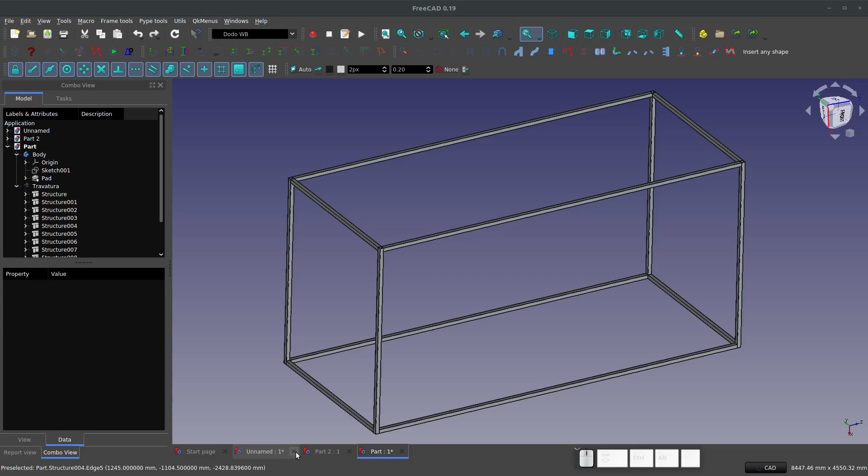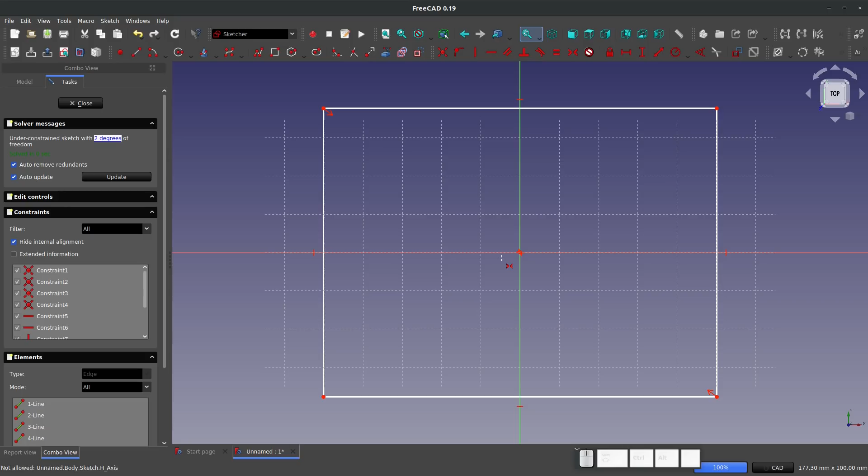So let's get started by making a new part. And in here I'm actually going to start with the Part Design workbench. Now I'm sure that you can do this from a sketch as well, but I'm going to choose like a reference solid here. So sketching on the XY plane, it really doesn't matter too much what my dimensions are, but I'll constrain this for good practice. We'll give that a vertical dimension

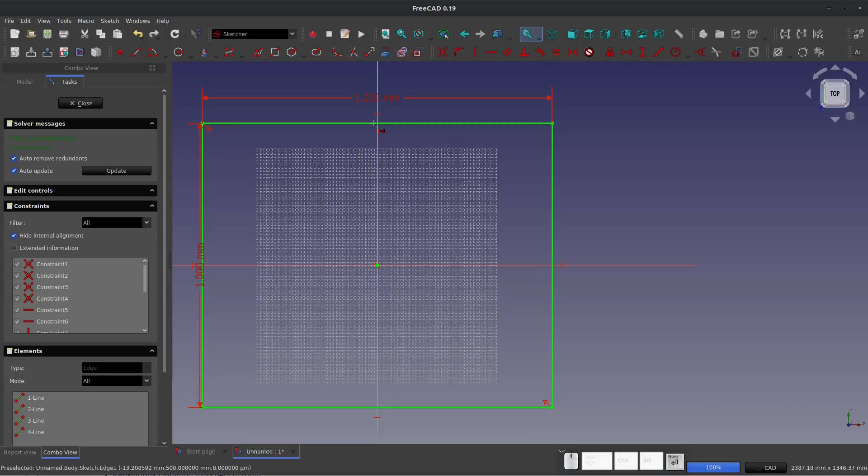of, say, a meter. And notice I have my keyboard monitor here if you need to see my hotkeys. Also, of course, Shift H rather. Let's go with 1200 maybe. We'll close, do an extrude, and let's do maybe 500 millimeters in this direction.

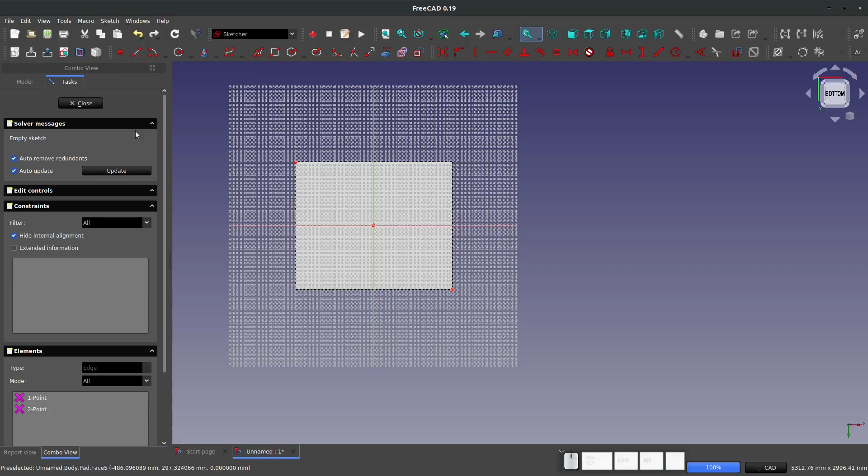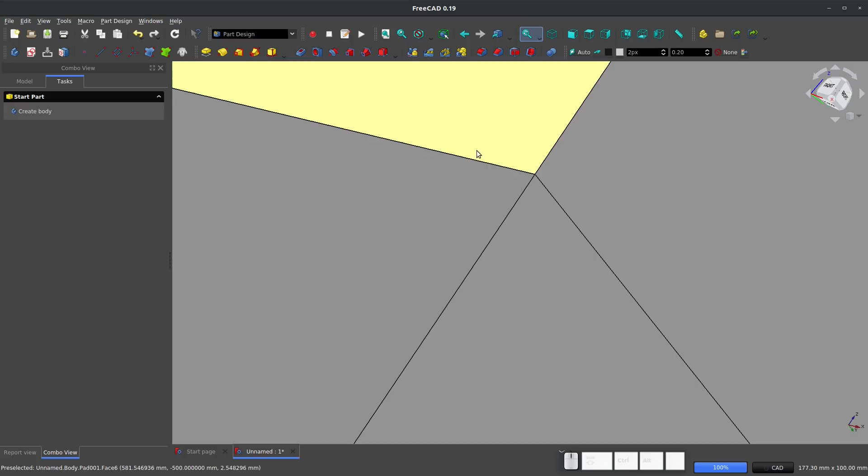I'm going to select this face now and create another sketch on this face. We'll convert here and here, and I'm going to make a rectangle of the exact same size. We'll close that. We'll do an extrude. Maybe this time a meter. All right, so I have a rectangular prism that has a line going through it, right? And I want to illustrate why I have that line.

So let's pretend that we want to make a rectangular frame, and all of these edges we want to be structural members. Well, I'll go into the Dodo Workbench, because otherwise this would be a lot of extrudes. Let's go to this button right here, Open Frame Branch Manager.

Almost sounds like some kind of position you'd hear at a bank, right? Like, oh, I got to make a deposit. Let me get the Frame Branch Manager or something.

I'm going to choose a profile, and of course there's a number of profiles to choose from, but I'm going to keep it simple. RH, this is square tube, 40 by 40 by 5 millimeters thick, and I'm going to select the edge of the solid that I wish to turn into a frame, and notice all these edges are going to be frame members, right? Weldment members. So I'm going to select my edge and click OK.

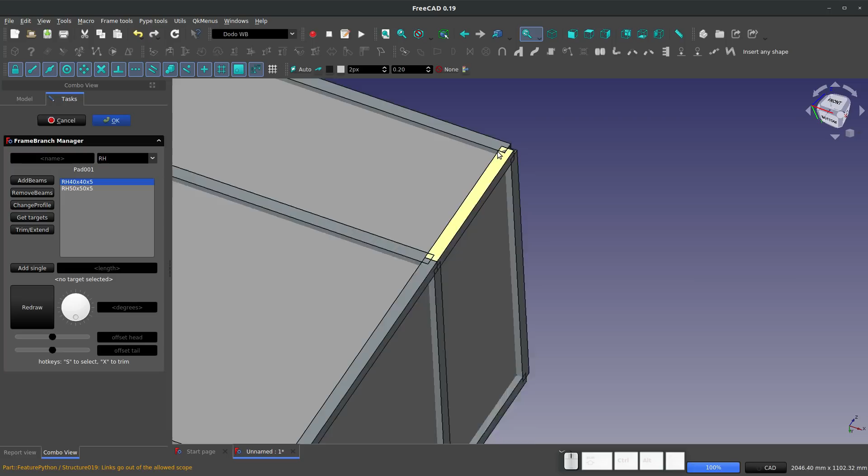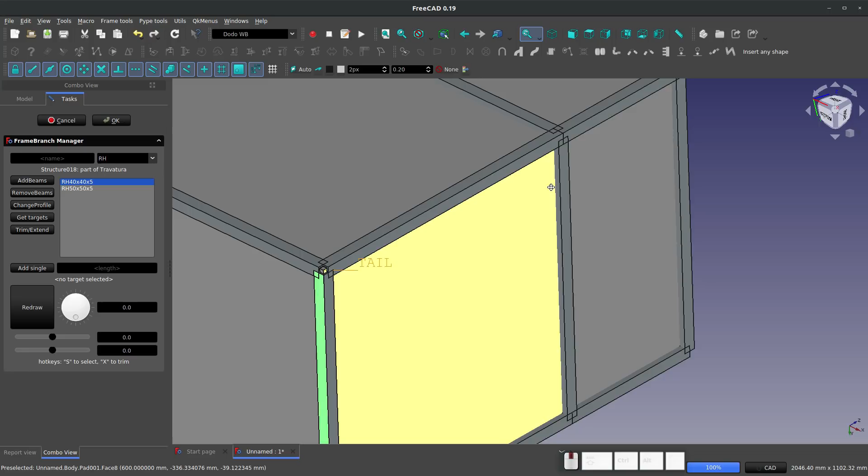And when I do that, you can see all of these structural members show up. Really fast and handy way to make a frame, and all these are 40 by 40 by 5. So let's get into how to deal with this edge treatment. Well, first off, I have this member here, and it starts in the middle of this and ends in the middle of this, and I'd like to address that. Maybe I'd like it to end at this face and end at this face.

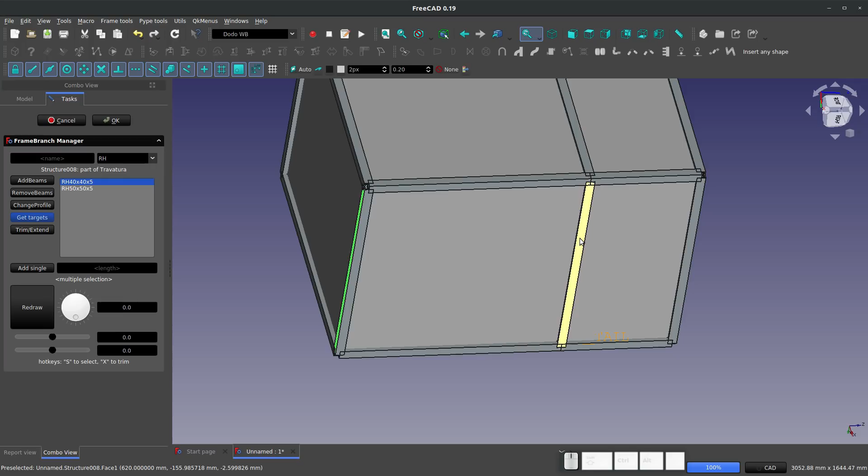To do that, let me select this face. I'm going to hold Control and select this face, right? So I have the two faces selected that I want the ends of this to end at. So I'm going to click on Get Targets. And just with that clicked, now these two end faces are what we call targets. And I'm going to click on the element that I wish to trim or extend, and click on Trim and Extend. And it trims it and extends it to these targets here.

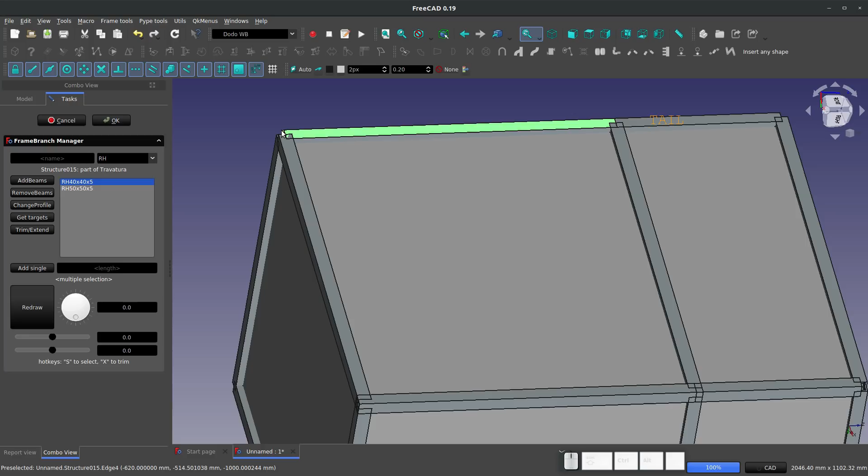Isn't that handy? Now I still have these targets saved, right? So I can select this piece and trim and extend, right? Now I can come down here, and I can select these two elements, trim and extend. And it does all of them at the same time. So that is a nice, easy way of doing this.

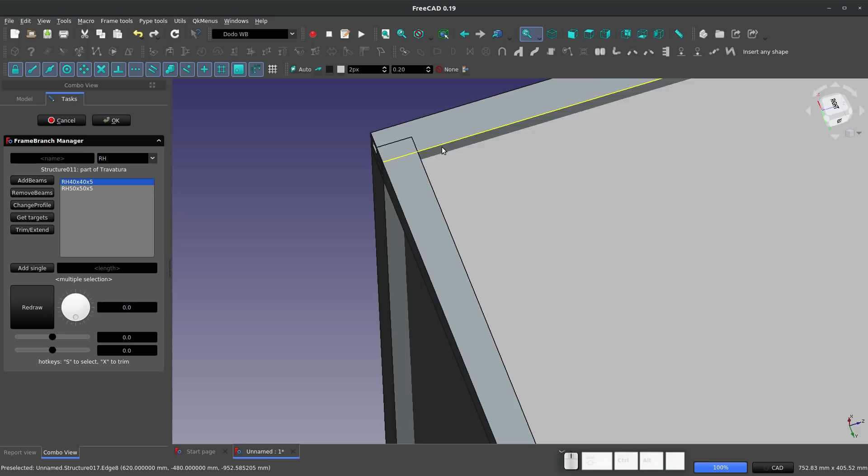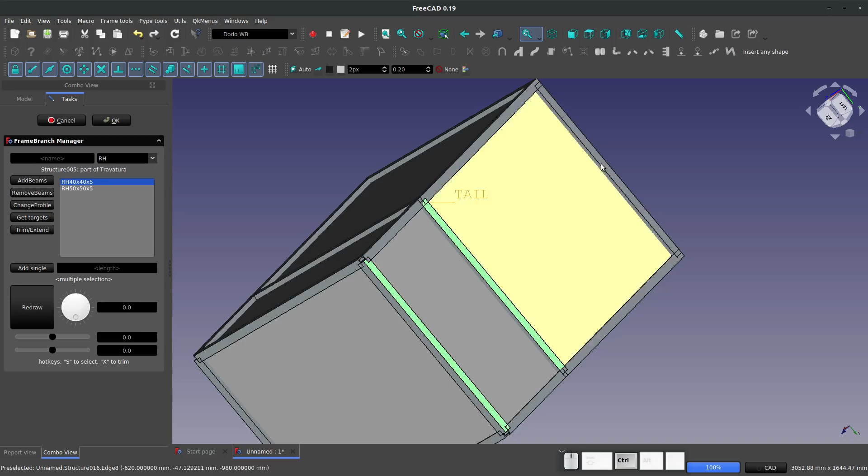Now, I may want to adjust some of the other elements, right? So I choose this inside face and this inside face, and I want all of these vertical members to be within these two faces. So I choose Get Targets, right? Now these two faces are the targets, and I hold Control. I'll select all of these 6 vertical members, and now trim and extend, and they're brought to be the correct length.

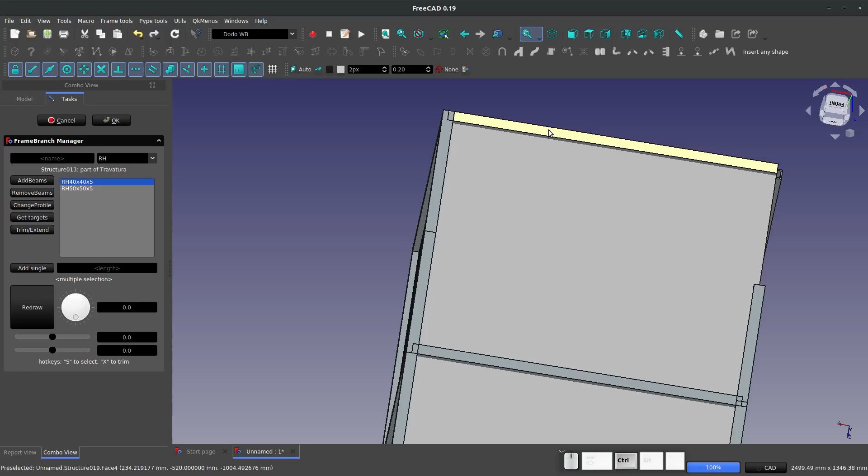Now same here. How about I select this outside face and this outside face, right? Two references on either side. Trim and extend. And let's choose this outer guy. Well, we should choose inside faces, shouldn't we? So we'll choose an inside face here, and an inside face here. No, but not that, right? First I want to get my targets.

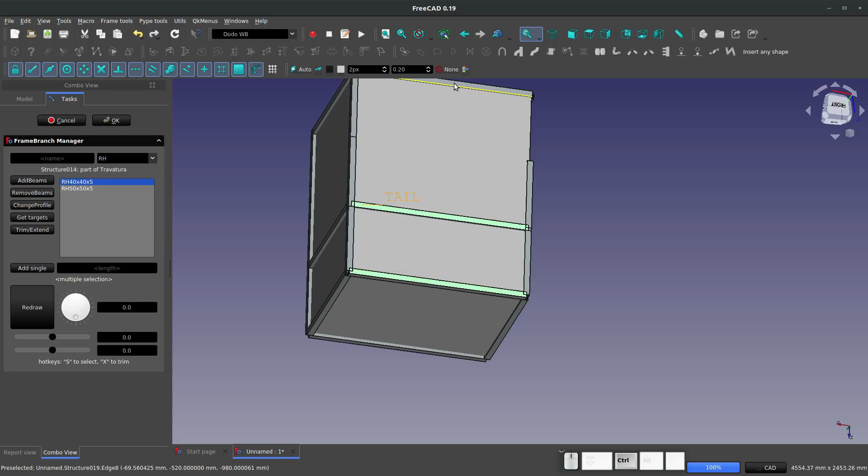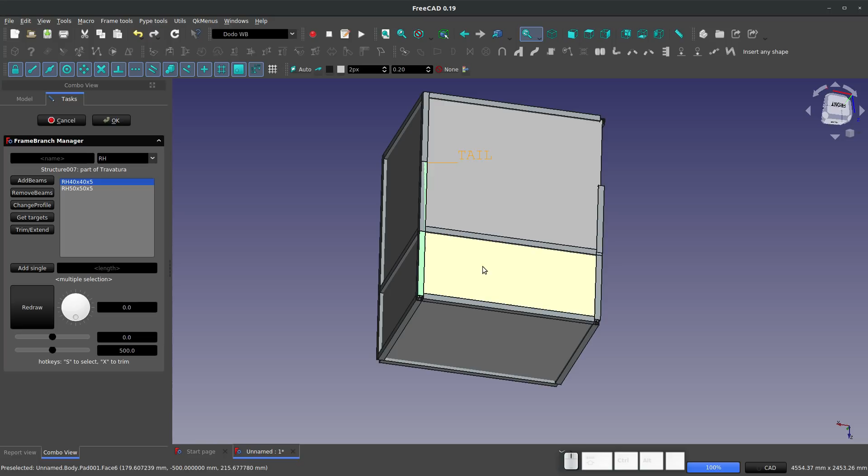So those targets are the inside faces, and I select, say, these three members here, trim and extend, and they're all made shorter to meet up with this face. Right, so now I may have a target here and here. So we'll get targets, and I choose this piece. Well, something happened over here. So, easily fixed. Maybe I accidentally selected that here.

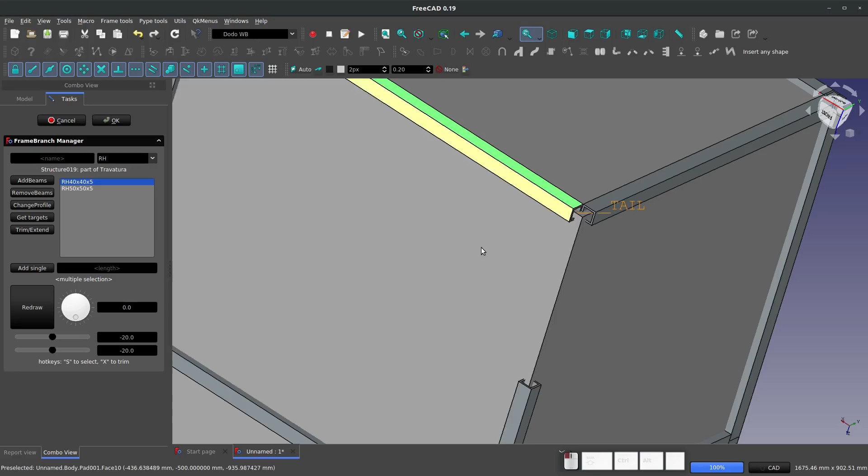Actually, we want this outside face. And I can simply retrim and extend this one if something goes wrong. So we're going to get targets, select this guy, trim and extend, and we've fixed that pretty easily.

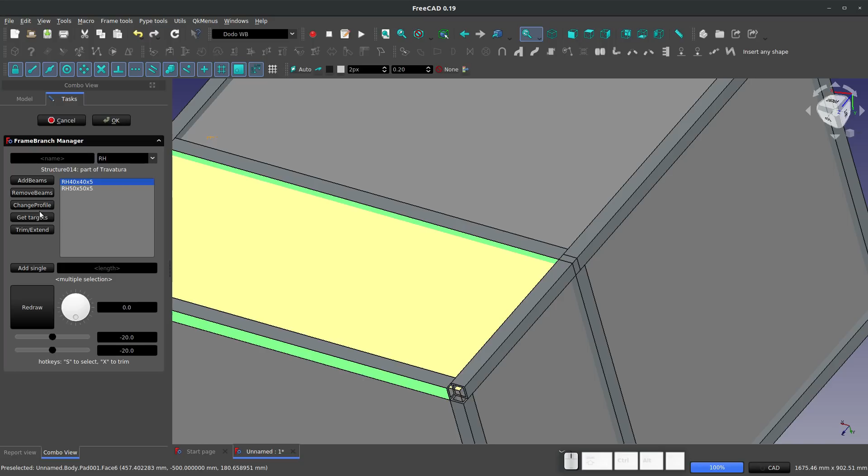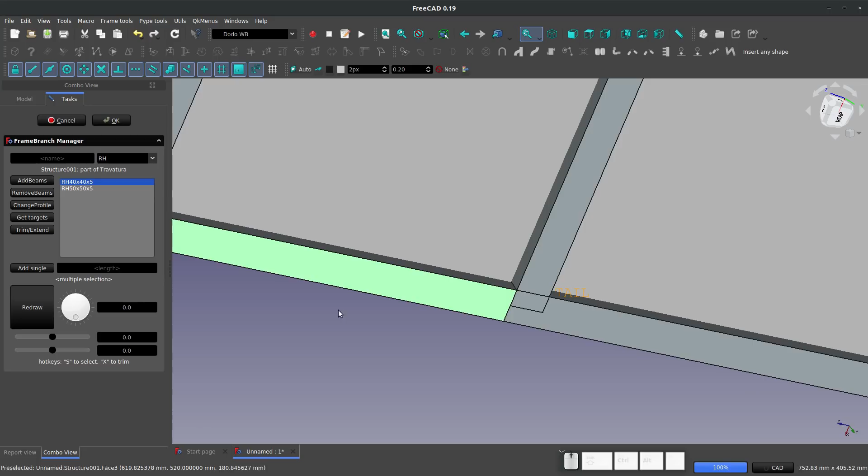So next, this face and this face will get targets. Then I'll choose here and here, trim and extend. And you can see how we pretty easily get all of these parts to fit together well by simply clicking trim and extend. In fact, I think we are almost there. We have some more interfering faces, but I think we've made a pretty good little frame here.

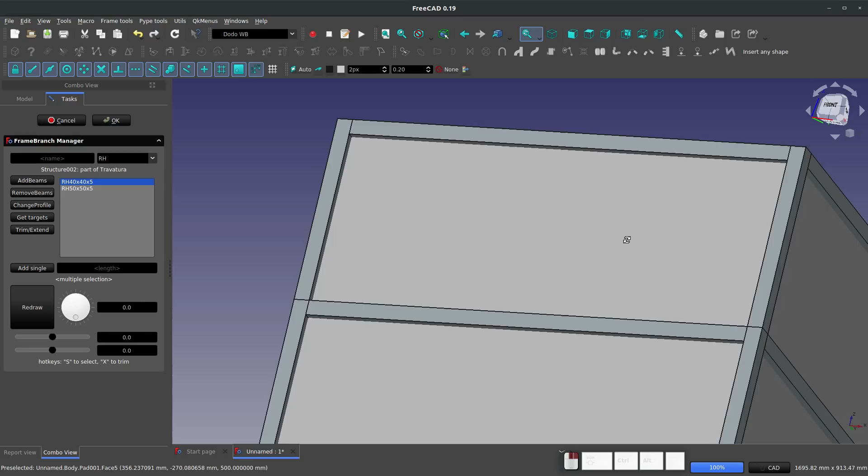So I choose these interfering faces, we'll get the target, and then I choose everywhere that I see an interference. Interestingly, that one isn't interfering. Those are all good. So just this side it looks like. Trim and extend. And now it looks like, I believe, that we have a complete frame with everything sized to the way that we wish to have it.

So the Dodo Workbench is quick, easy, and powerful. If I were to try to make the same thing with a bunch of extrudes, you can just imagine what kind of mess that I'll run into with trying to make all these sketches and trying to get all of them to work together and be updatable and everything. So this makes pretty easy work out of everything.

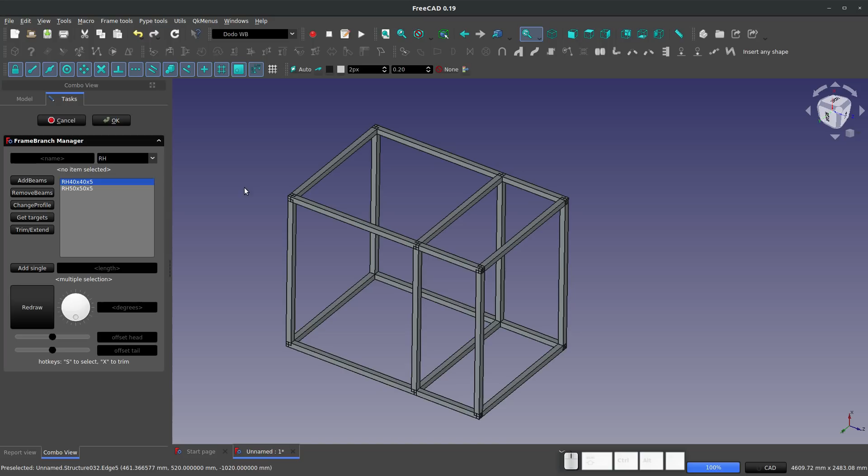Oops, I accidentally hit OK, which created a structural member over my old structural member. So I'm going to hit Control Z there and cancel. And you basically always hit cancel to get out of that. So that is a way that you can make frames in FreeCAD. Let me save that. So what else can you do with this workbench? Let's talk about some of the other functionalities and limitations in here.

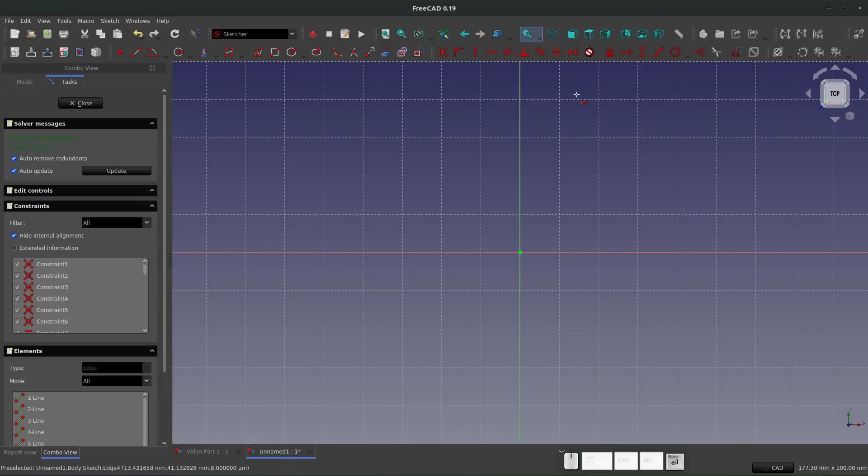I'm going to start a new part now. And this time it'll be very similar, creating a sketch on my top plane, but this time I'll go with a hexagon shape, and we'll make that horizontal, and we'll give this a dimension, how about 500 or half a meter. We'll close, extrude, I'll go symmetric, and let's say 1 meter.

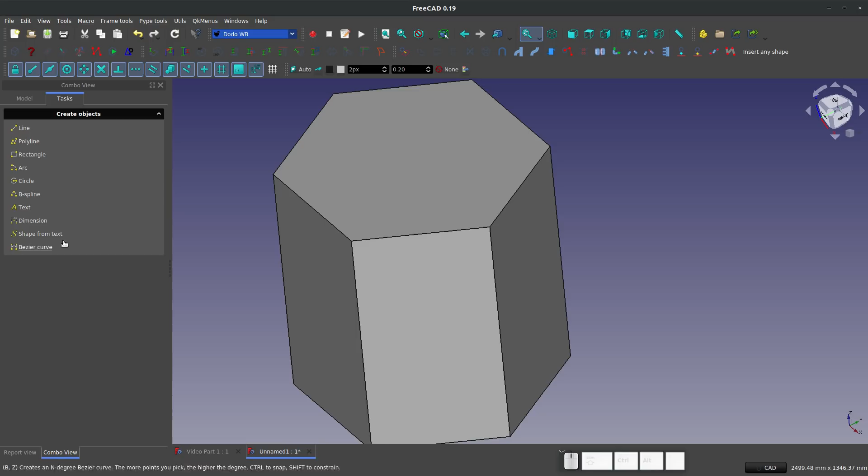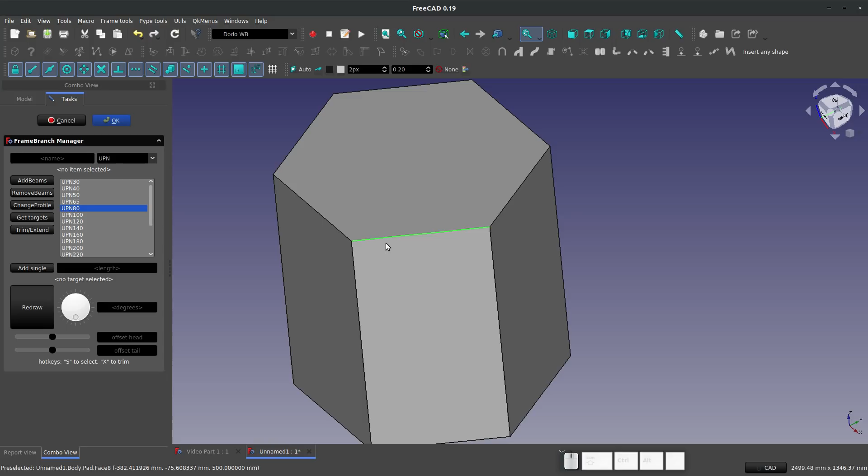With that, if I go to my Dodo Workbench now, and select this edge, we'll open up our frame branch manager, just like we did before. Here we have 40 by 40 by 5 millimeters thick, and, in fact, let's do something unique. How about UPN 80? It should be a U channel, and I click OK. Now I have U channel added to all of my faces.

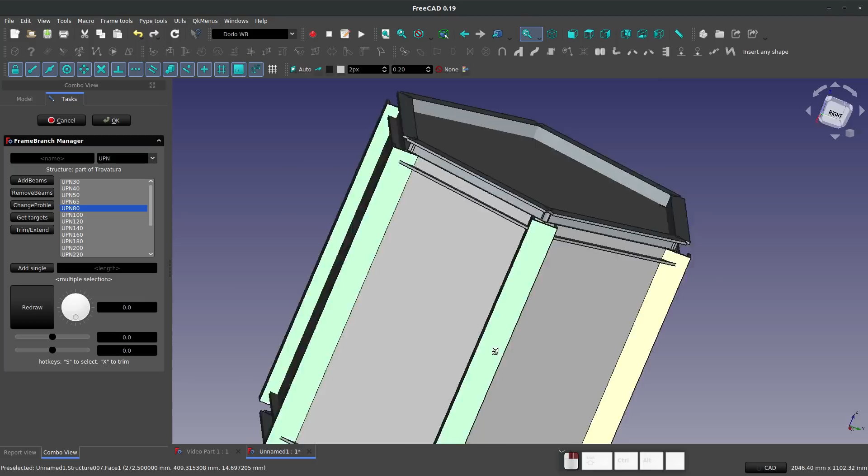So I have a U channel hexagon, and when I go to trim this, I can select my upper and my lower limit as before. I click on Get Targets, and then I select all of the structural elements that I'm working with. And now I choose Trim Extend, and as we've done before, this trims and extends very well.

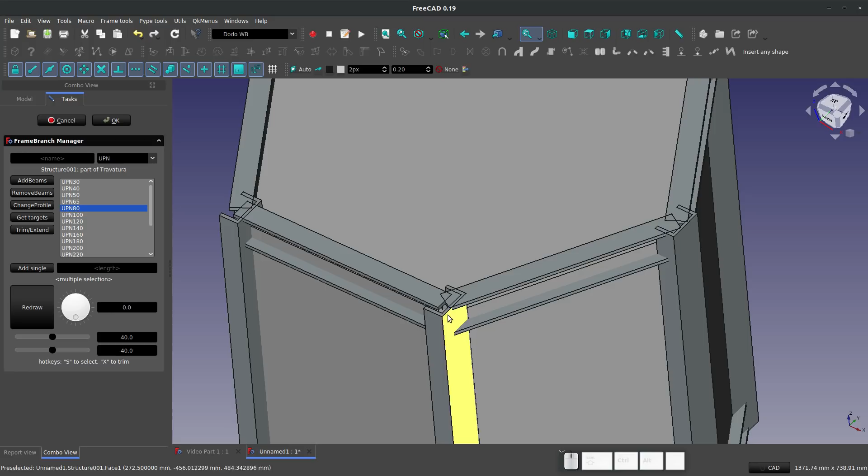But my U channels are all oriented with their U's in the same direction. So what do I do if I want to change things up a little bit? Well, I can actually rotate this U-channel about the axis of the edge that I've selected to create this by spinning this little slider. And I can change the angle that I wish to have. So here, maybe I want to have a 35-degree angle or a 40-degree angle. I'll stick with 40 here.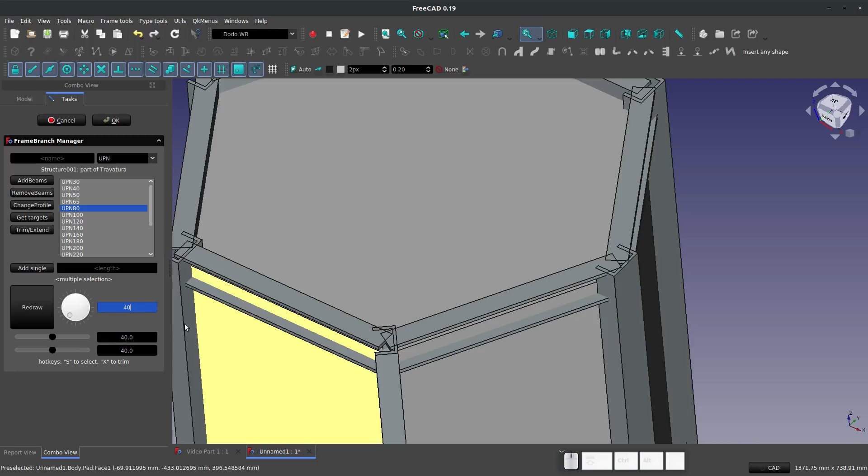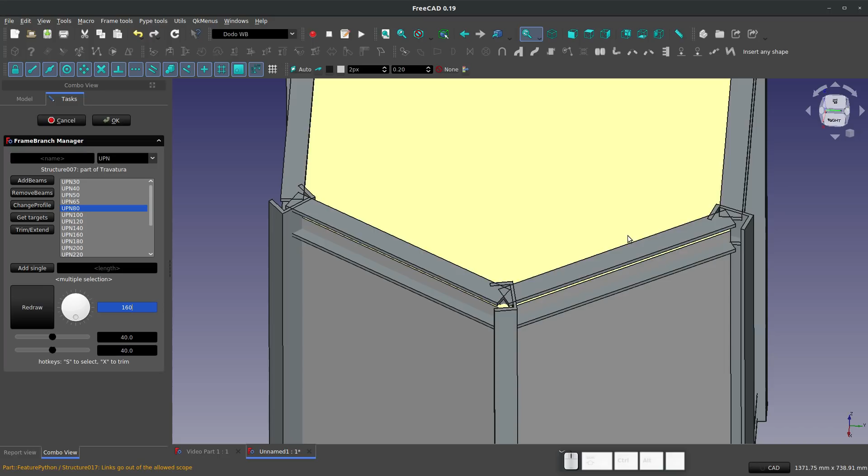Let's go with 40. And then here, maybe I want to have a 100-degree angle so that they all kind of end up here. I need to actually add my 40-degree angle again, right? And then see, every corner is going to be another 60 degrees. So I can say 160 for that to be pointed kind of towards the middle. And this one is going to be 220. You can see the pattern, just adding 60 degrees every time.

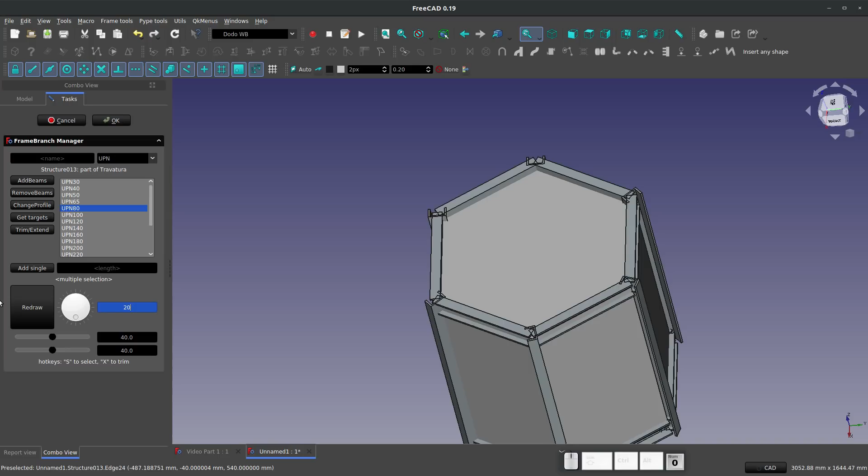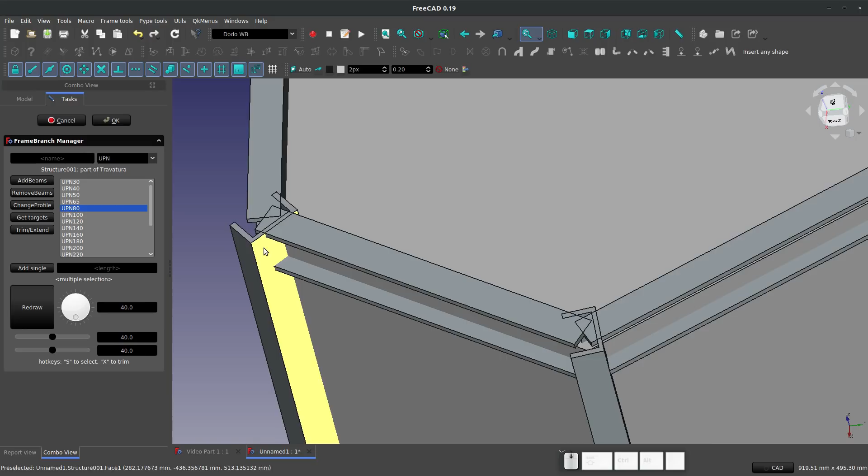220 plus 60 is going to be 280, and so on. So I can orient all of my U-channels in that way. Now what if I want to trim these to fit within the faces of the U-channel? Well, I can select this face and get targets, and this is where we start to see limitation. I choose this U-channel and I choose trim extend, and the length changes, but the face angle is not changed to the angle of this face.

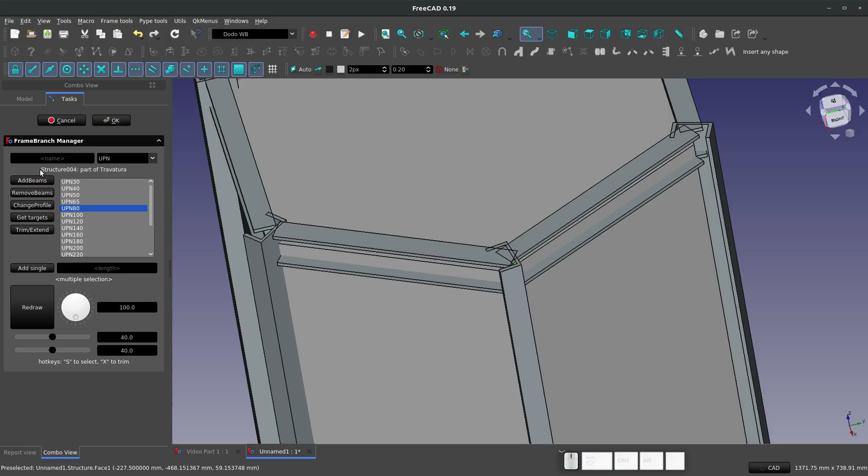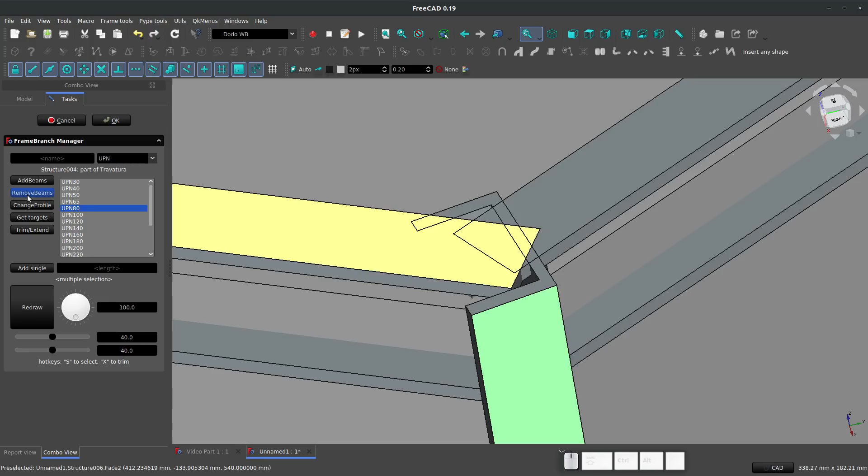And it seems to be a limitation with the Dodo Workbench. You must have faces that are going to be perpendicular to what you're trimming to. Otherwise, at these angles, it just doesn't seem to work. I've tried this in as many ways as I can think of. So even if I try to change the profile and make these UPN 160, or in fact, I think it's 180 that I want.

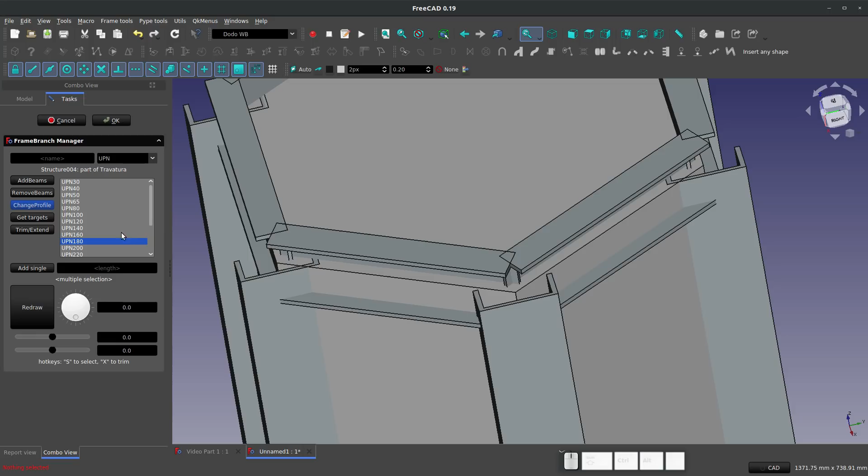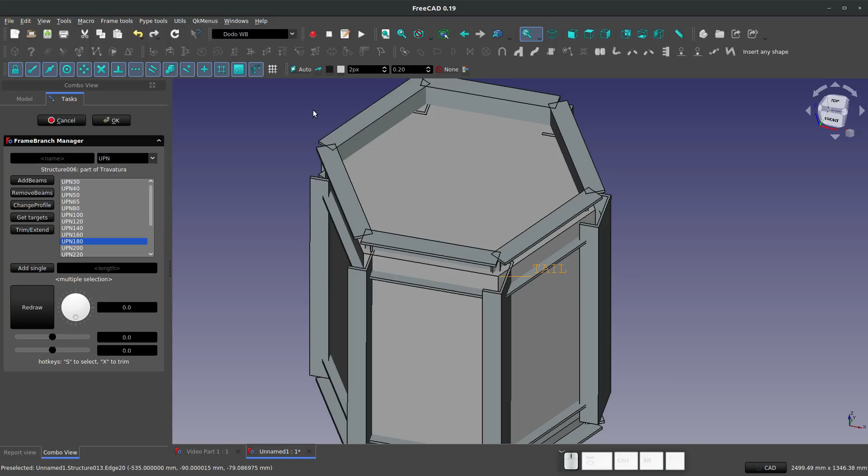So even when you change profile to something big like 180, and you can eliminate intersections and whatnot, this still just doesn't seem to trim the way that I want it. So if anyone knows how to get those to trim normal, that would be pretty cool. Otherwise, I think we're just dealing with a limitation there. So bear that in mind if you have to deal with angles like these, that you'll have to use some other sort of post-processing to get these faces to land right. I don't know if some kind of draft would work more effectively.

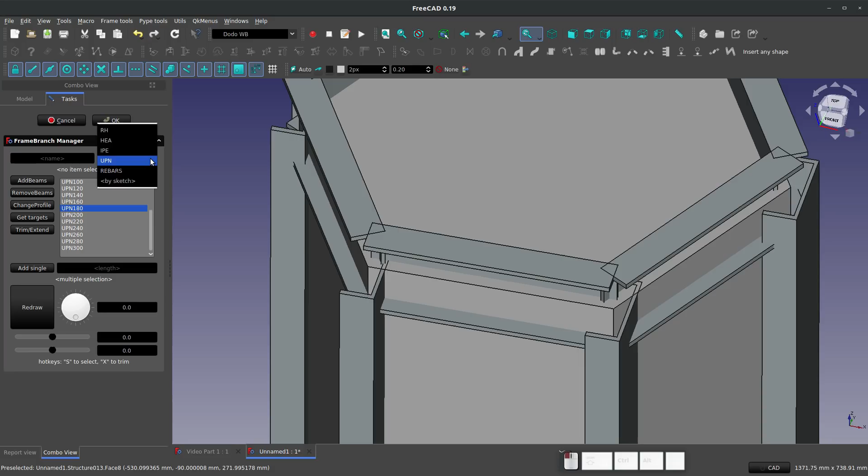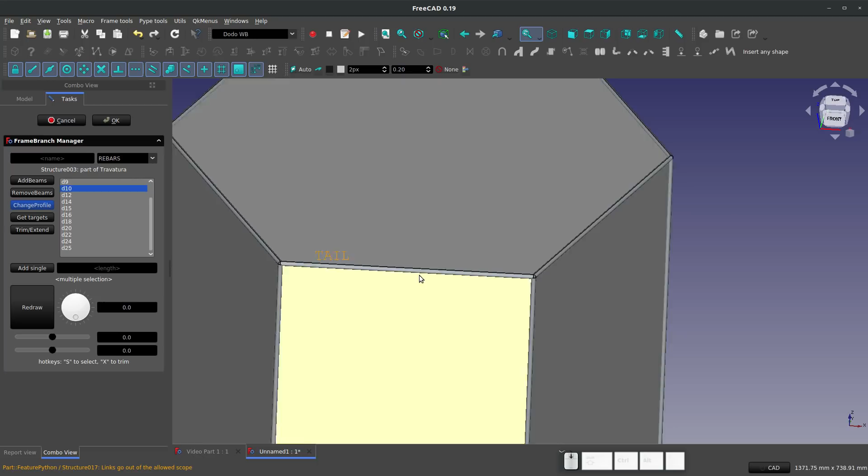What else to cover? What if one of these standard profiles, whether it's U-channel or square pipe or an I cross section like this, or even dowels, what if none of those seem to be satisfactory? Can you make other profiles? And the answer is yes. So I'm going to cancel this. Let's go to this next button, Create Customized Beam Profiles in 2D. Open this up, and I'll give this a lot of real estate since we're going to be working on this.

You can choose any of these profiles, and you can see we have what you would think of as a tabulated drawing here of the profile, and you can enter whatever values you want. So I want my H value, say, to be 100. So make that 100. I want my B value to be something like, how about 60? I'll have my D value. Let's make that pretty big. How about 75?

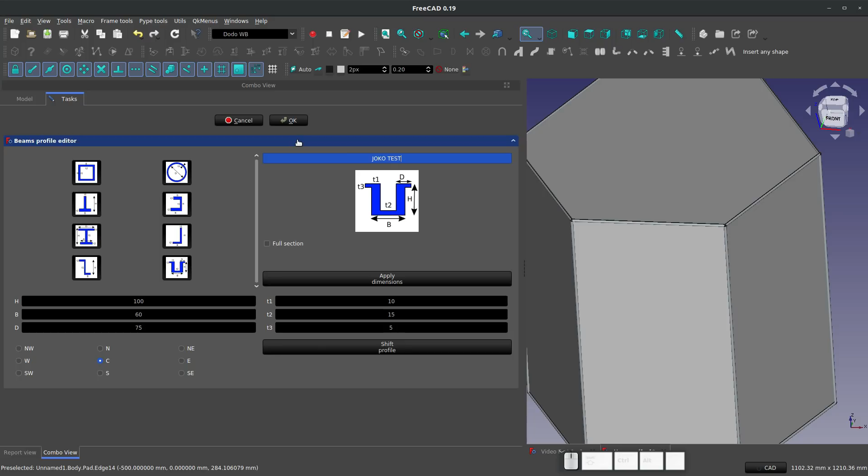And then my thicknesses, right? I want to have my first thickness. Let's make that something like 10. Thickness 2, we'll make that 15, right? So that'd be the thickness here. And then thickness 3, which would be here. We'll make that something like 5. And then we can type in a name, right? So we'll call that test, and we'll say OK.

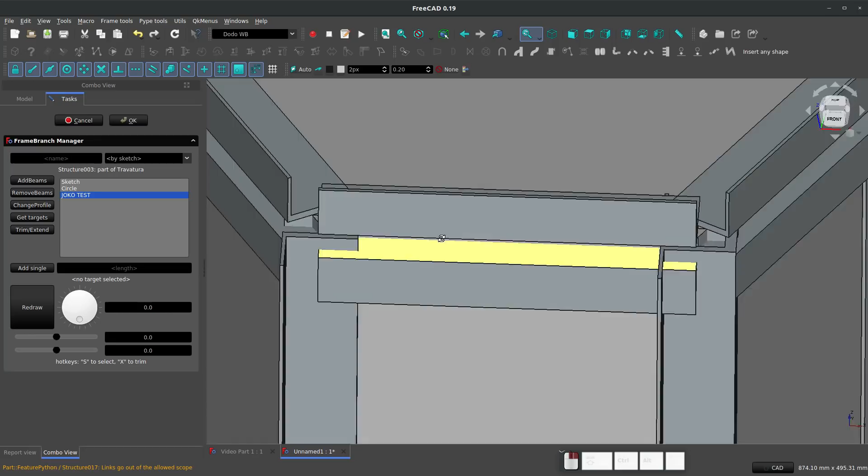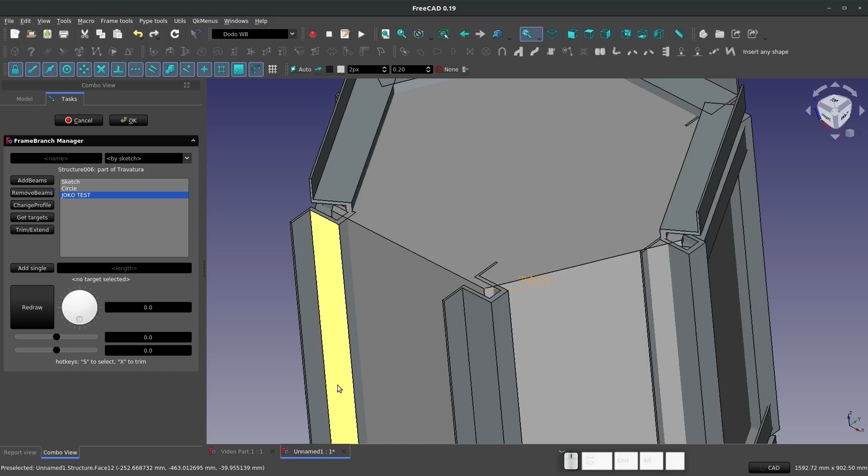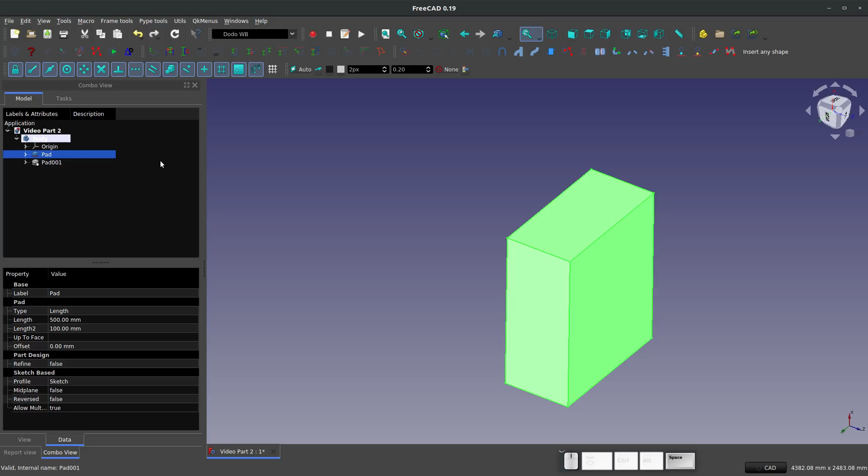Alright, so if I go back to my original one here, and I ask myself, what if I want to have different profiles in different positions of this frame? Can we do it? And we can, so I'll do a save as here. I'm going to go through here and delete the whole frame, and I can show my pad. Alright, so I've got my 2 pads here. What if I want a different profile through the center here than I do everywhere else? I sure can do that.

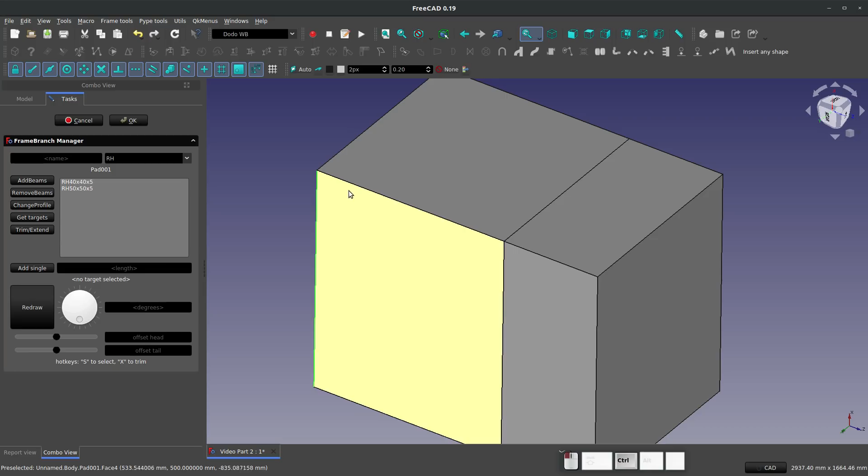The first thing I'll do is in my Dodo Workbench, open up my frame branch manager, and select all of the edges that I want to have one profile for. Here, here, here, here. Alright, so everything is selected except for the edges that I want to have other parts for, and I'm going to choose my square tube. You may have mixed luck using this method with other non-symmetric profiles. Sometimes you might get a weird twist or something, so be mindful of that.

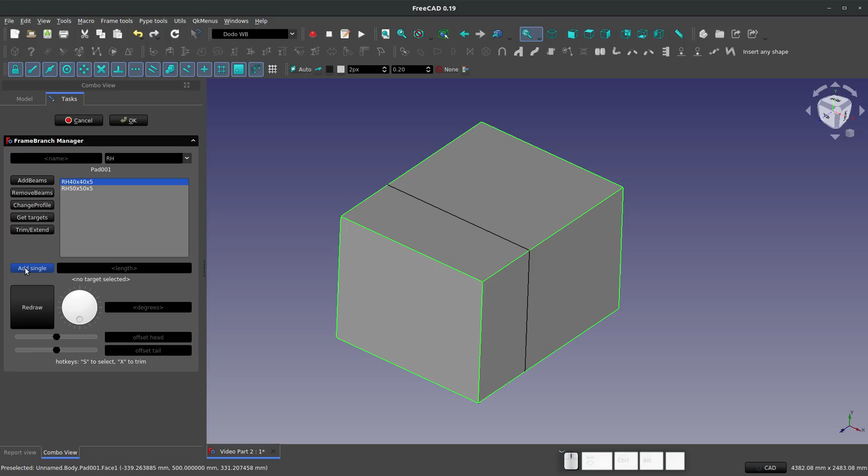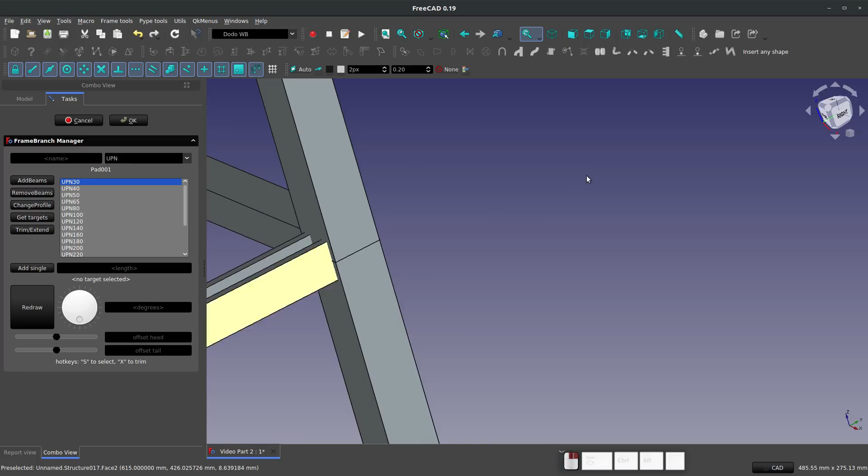I'm going to say add single right here, and then I can choose my other edges. Maybe for some reason or design intent I wish to have a round dowel profile or a U-channel. Maybe I can choose my smallest U-channel here, add single. And if I get rid of this, you can better see the U-channel. And that's probably a good illustration of how these things can twist. My U-channel isn't facing the same way.

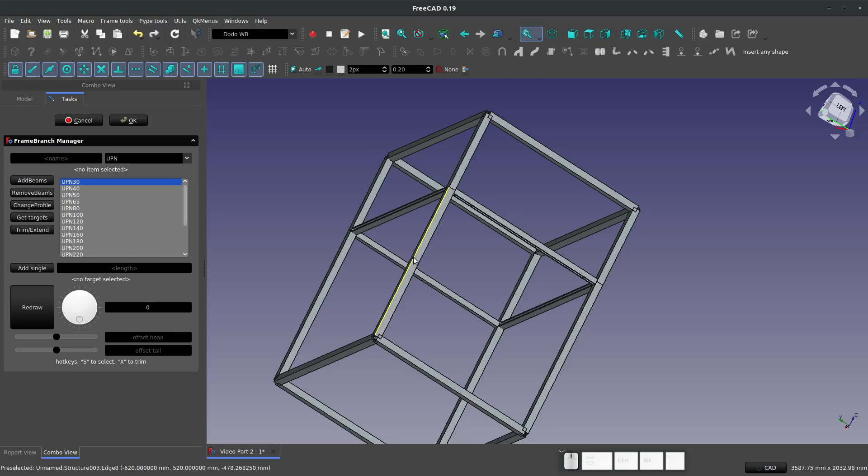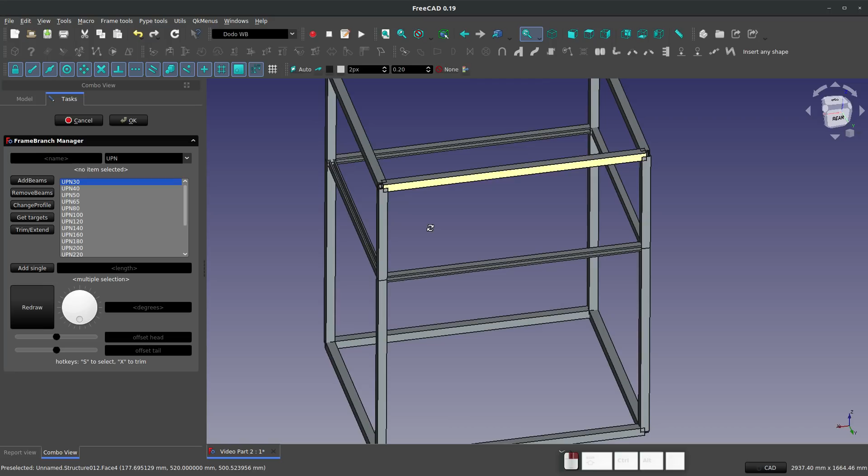And if I try to enter 180 degrees, the add singles work differently, so I don't think it will twist the same way. So be very mindful of how you use add single. Because I've run into the same thing before, when I go to get targets and then trim, that also doesn't seem to work. So add single is a very good way to change up how you add things, but be aware that it's not quite as useful or functional as adding them all with add beams.

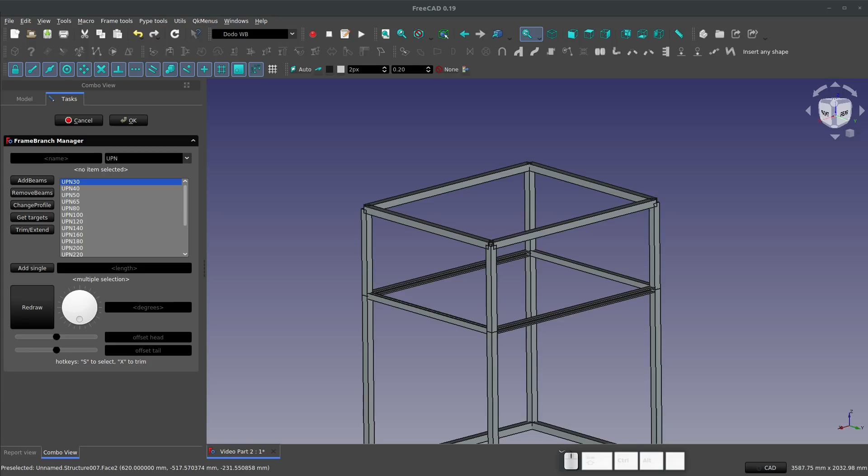So that is kind of an overview of the Dodo Workbench, and what I've used today is known as frame tools. There's also a whole set of controls over here known as Pype tools. And I haven't even covered all of the frame tools, and I've already made a long video. So maybe we'll cover this some more, but it's an easy way to make some frames in FreeCAD.

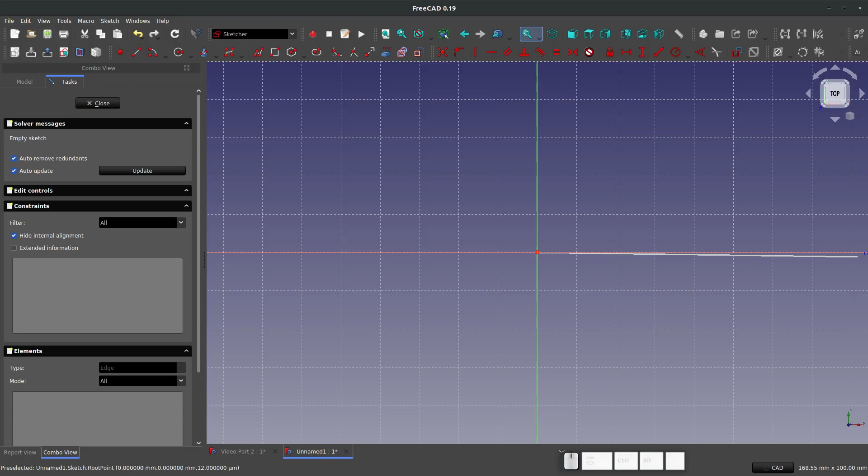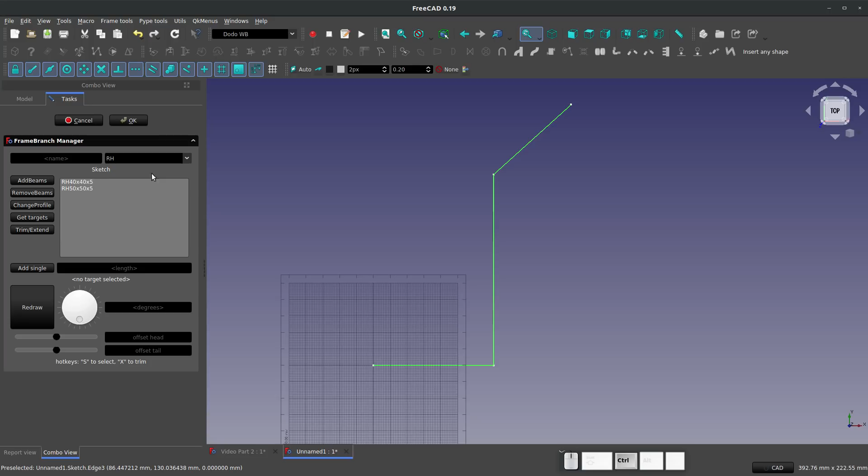Now also, before I go, I should cover if I make something in the sketcher. That plane will be fine. It may be worth mentioning that if I create a sketch and I close, now if I go to the Dodo Workbench, even with a sketch, I can open up my frame branch manager. I can select my stuff, I can choose a square tube, and I have a sketch that drives a square tube as well. So that should hopefully be interesting for now.